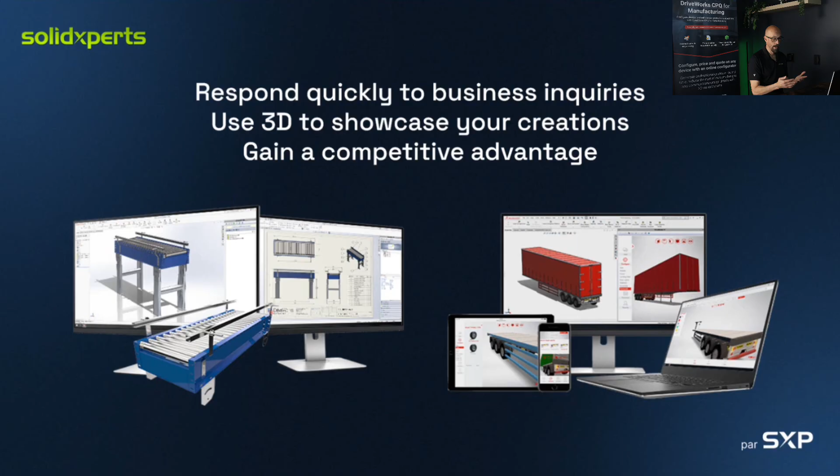And reduce the cost of those custom designs, because every time a customer just asks for a little changes here and there, the human or the team that does those changes, it's costly. So we're going to talk about how quickly you will be able to respond to those inquiries and gain competitive advantage because of those solutions.

So that product is DriveWorks, the perfect partner for automation. Our agenda of today is going to be introduction of DriveWorks, the DriveWorks solution. Brandon will help me out on that too. And we have the perfect guy to do the CPQ example for us. And at the end, comparison, we'll have a Q&A session also before thanking you for our webinar. And please stay until the end, because there's going to be something for you guys at the end. All right? I won't say any more.

So stay with us. Introduction of DriveWorks. So what's DriveWorks? Well, they've been inside SolidWorks solutions since 2001. It's one of the oldest Gold Partners of SolidWorks. I was in grade 1 at that time. Oh, okay.

They are focused on developing innovative, robust, and easy to use software since that time. Brandon will talk about how DriveWorks is a solution that you can own also. So we are a reseller of that solution. They do business through resellers, so we are your first point of contact for those solutions, and we have the expertise to do so.

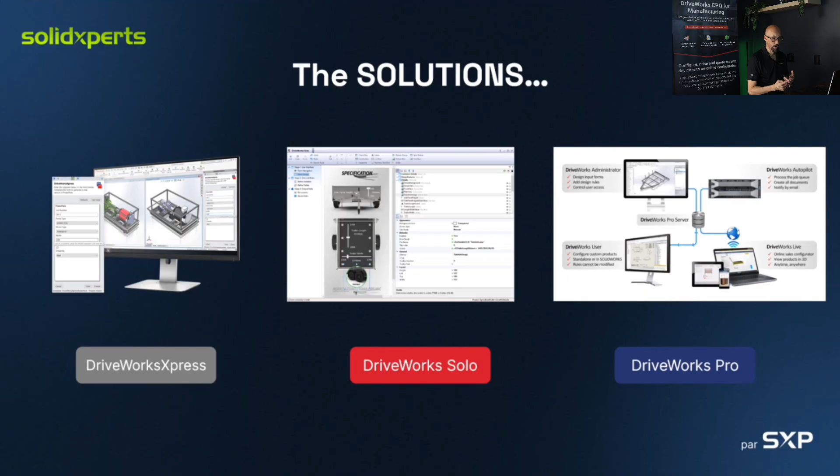So here we go - there's 3 solutions in DriveWorks: the Express, the Solo, and the Pro. So if we start with the DriveWorks Express, what does it do, Brandon?

Of course, the biggest subject that we're really addressing here when we're looking at DriveWorks is automation, or specifically - anybody who's worked with SolidWorks for a little bit of time may know what I'm talking about - parametric modeling. The concept of going into a 3D model, making some changes, and everything adjusts as it should, instead of exploding and falling into error and eating more of your time. You can make equations, you can make small interfaces in SolidWorks, and to be honest, as a man who's done that work already in the past, it can help automate some of the processes in your drafting department.

But it could be complicated to set up, complicated to maintain, it might not always be reliable. The beauty of DriveWorks Express, for example, is it eliminates the complexity of the steps of trying to parameterize that model. Once you've cleaned up your model of anything that can break, DriveWorks Express allows you to take control of these models easily and quickly. And more importantly, it's free with every single license of SolidWorks that you buy.

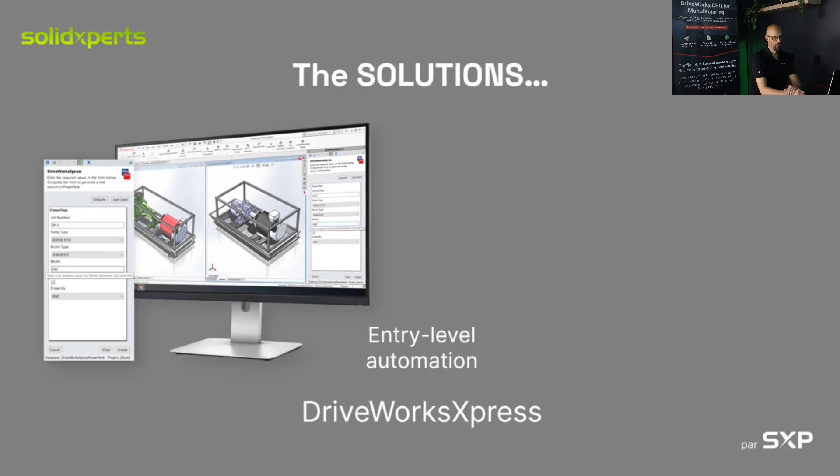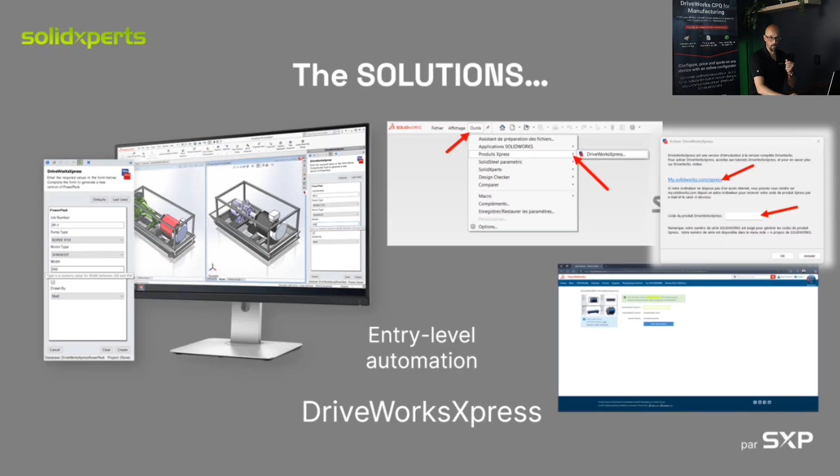Oh, and by free, meaning, how about activating your product? So why not go into tools inside SolidWorks, go into Xpress Products, and click on DriveWorksXpress. It will ask you to go on your My SolidWorks, and automatically it will know what computer is trying to seek that code. So it will read the serial number and give you a code that you'll be able to enter and activate your product. It's very easy, so try it.

Now we're going to talk a little bit about DriveWorks Solo. For me, when people first ask me what's the difference, what does Solo do that Express doesn't do, it's going to do a little more. Brandon is going to explain that to us, but keep in mind, it says Solo, so it's helping the person using it on his SolidWorks.

Precisely that. And just to make sure the image of what exactly these tools are is clear - when it comes to Express, Solo, and Pro, we're addressing different levels. So with every level you go up, it opens up more options, or vice versa, with every level you go down it will limit your options. So with DriveWorks Express, what do you get? The ability to capture your 3D model, to capture any 2D models affiliated to it, and it's going to generate a new set of files with a new name in a generic place, where you're more than welcome to go and do a pack and go afterwards and move it towards where you like.

However, coming into the Solo category, now you have control over the nomenclature of your parts. You can standardize the way parts are named, assemblies are named, drawings are made. You can also capture elements of drawings like scales, in order to make sure that when they're generated, they adjust a little bit better afterwards, as when pieces get longer, shorter, views - everything's going to need to adjust.

It doesn't stop there though. The options that you're allowed to set up as an interface for yourself offer more in Solo than they would in Express. In Express, they're very limited options - basic check boxes, yes and no's, menu boxes - but you get a little bit more to offer when it comes to Solo.

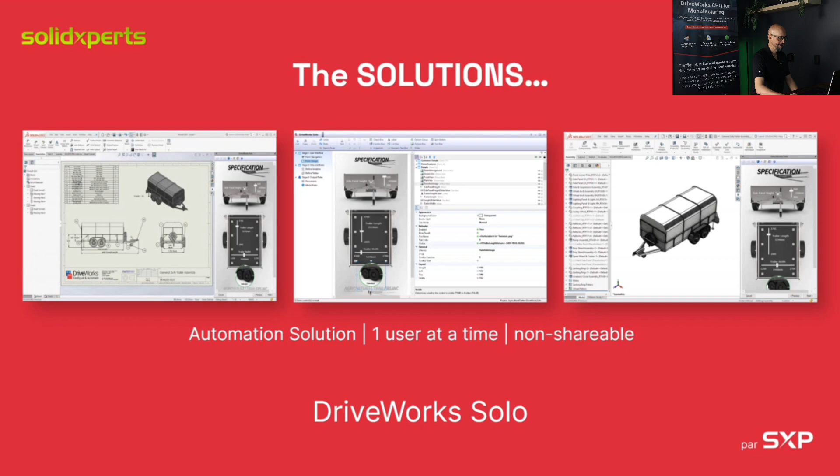All right, so the next solution is naturally the DriveWorks Pro solution, but I'm gonna let you stay at the edge of your seat. Brendan is gonna talk a little bit more about what it can do, but you see that the package here is more and can do more. So I'll let Brendan talk about that, but just to keep in mind, what you're about to see with DriveWorks Pro is more on the side of being able to create a CPQ, a 3D sales configurator.

It's not just helping the guy using his own station to make his life easier. Now it's on the company level that life is going to be made easier. Let's talk about interactive 3D visualization, integration to other systems of the company maybe, and also have a true guided selling item for your customizable products, with fewer errors, right? So we're at that point of the presentation. Here, I leave the floor to Brendan, and it's all yours.

All right, folks. So when we talk about DriveWorks Pro, to me, that is the Cadillac of DriveWorks. Effectively, you're at the highest level of power when it comes to DriveWorks, thus meaning you have the most possible options available to you.

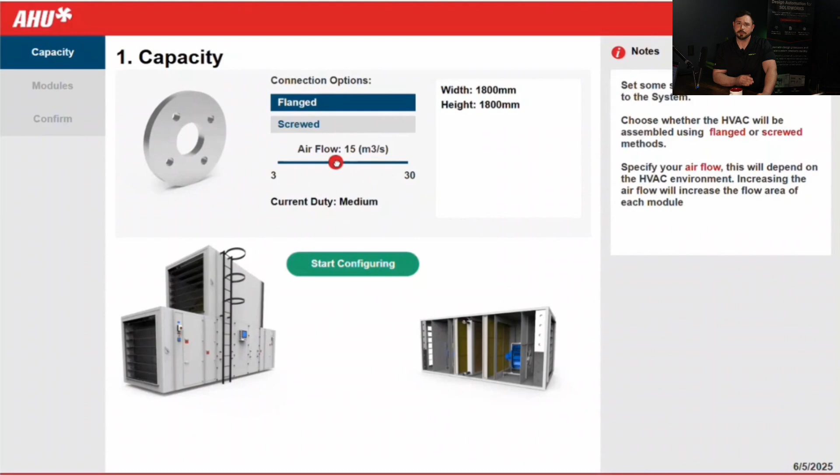The CPQ that I'm going to be showing you here right now is an example of a project that you can find on driveworkslive.com, as well as a variety of other projects that you yourself can go on right now and try them all out. Bear in mind that any project you try out is 100% made in DriveWorks.

This includes the interface you see here, for example, which is a project made for a generic HVAC company that does a variety of different modules. Everything we see in this interface was 100% made within DriveWorks. Every button, every dynamic menu that changes, every summary table we see is 100% made in DriveWorks.

Now, personally, as a guy who's had experience in HTML and CSS programming, it's not a quick task setting up a website, let alone trying to link it to your ERP with your engineering department and having sales incorporated in on this. There aren't many tools out there able to address all of that, especially at a comfortable pace.

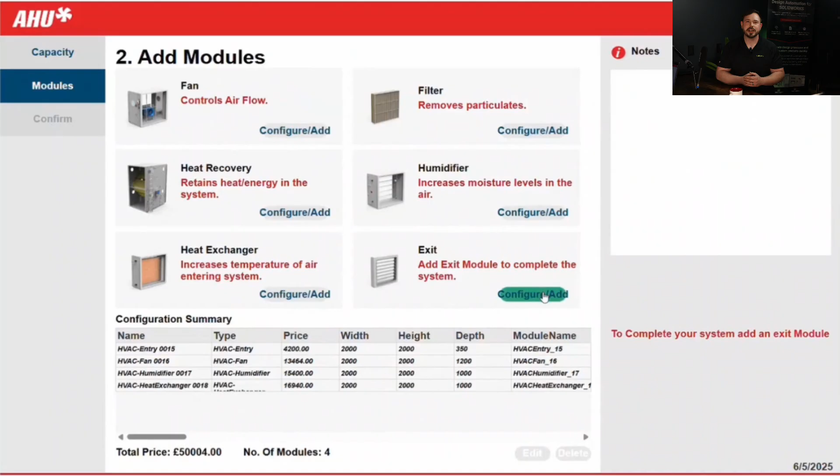So what we're seeing right now, I'm just going ahead and configuring several modules, whatever modules I might need for my HVAC needs, for example, and we can see that the menus are updating every step of the way. Now, I've only been talking about 2Ds and 3Ds up until now, but as Elliot stated, DriveWorks Pro is able to advance you across all departments and not necessarily just engineering.

With DriveWorks Pro, you have access to DriveWorks Live, which will allow you to make a web page like this that could be accessible directly for your clients or your distributors, for example, or maybe you only want to use it internally with your sales agents. This could be used by marketing. This could be used by engineering. This could also be used by production.

That's the fun part about DriveWorks, is you have the ability to expand the scale upon which it can lay its hands to increase revenue, to increase production. And as you can see here, quick point to note, I even just put my email and my contact information in here, which means I'm able to automate things like email sending processes, document generation processes, which I'll show you a quick example of.

What we see right now is the models that I just configured in that menu being generated one at a time. But here's the best part.

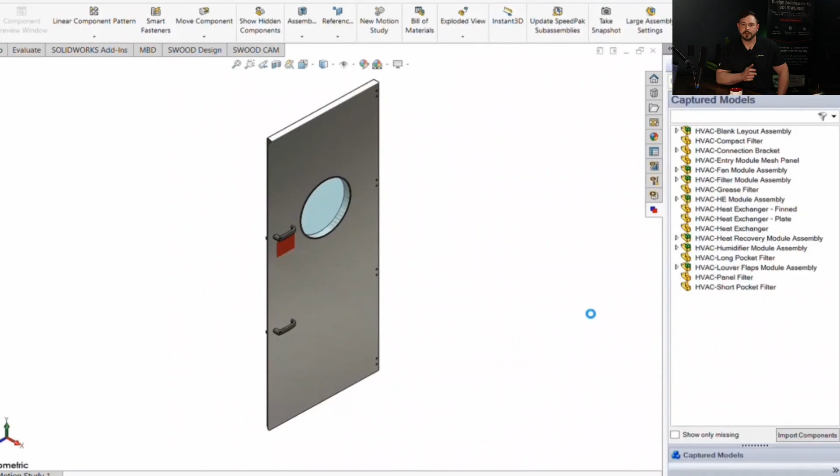Like mentioned with Express and Solo, those generations happen in your computer, so if you got a big generation to do, you're probably going to want to go take that coffee Ali was talking about. But with DriveWorks Pro, we have the DriveWorks Autopilot, where you can have a separate machine that is 100% dedicated to doing all your model generations in the background.

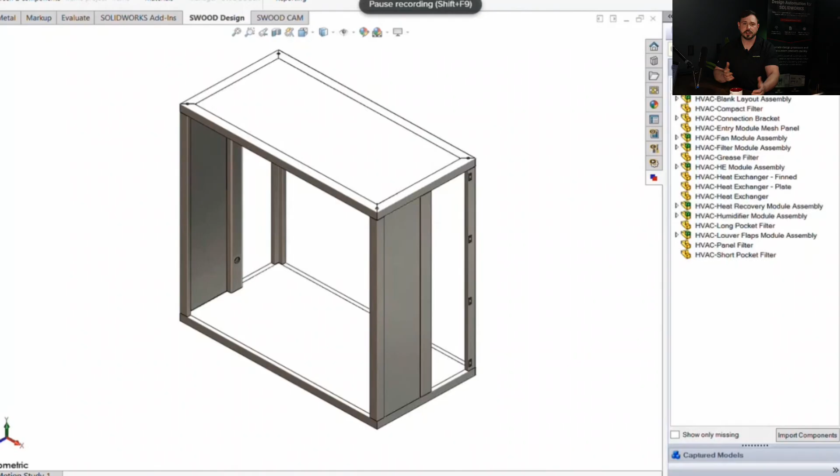Meaning your drafters have significantly less work. They fill out the interface, press generate, and then wait for that model to finish generating in order to advance it further. And above all, you're able to establish a workflow within DriveWorks Pro. This is how you connect your departments together, having states of approval, having steps to determine what should be launched where, and who should have the right to approve which documents when you get to those steps.

What we can see here is my autopilot just coming to finish a process of generating all of the models that I've just come to configure one at a time in the process.

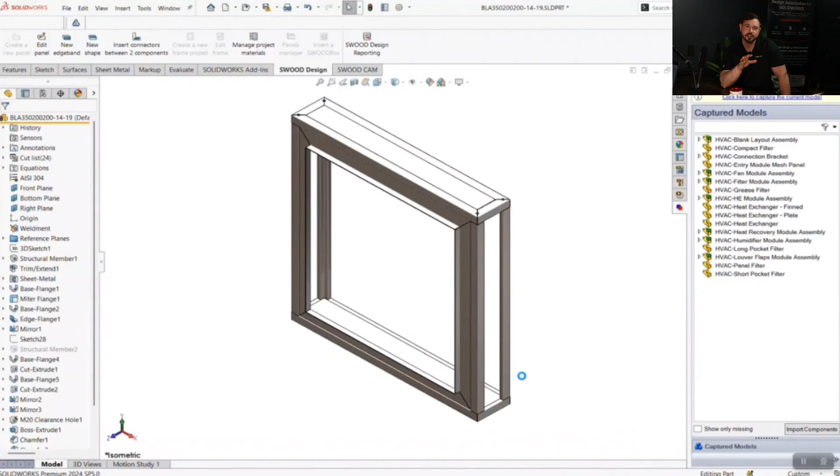And there's one more thing that I haven't mentioned. This to me personally is the cream of the crop of DriveWorks: the final assembly. What does that mean? Up until now, everything you've seen we've configured are modules that exist as a master model - you capture it and it just regenerates the same model with the changes you want. But right now, this isn't a master model. What DriveWorks is doing for me is building the final assembly from all of the models it just generated for me in the process.

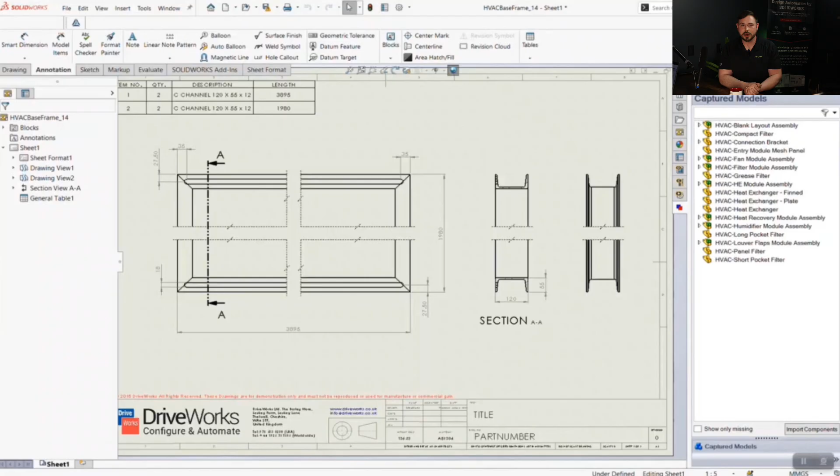And the fun doesn't stop there either, which you'll see a little bit later on in this example - it's also able to generate your drawings for you as well and try to predict the scale to make sure that, if it can't do 100% of the generation properly, then at least a good 80 to 90% is done, thus optimizing the time for your drafters altogether.

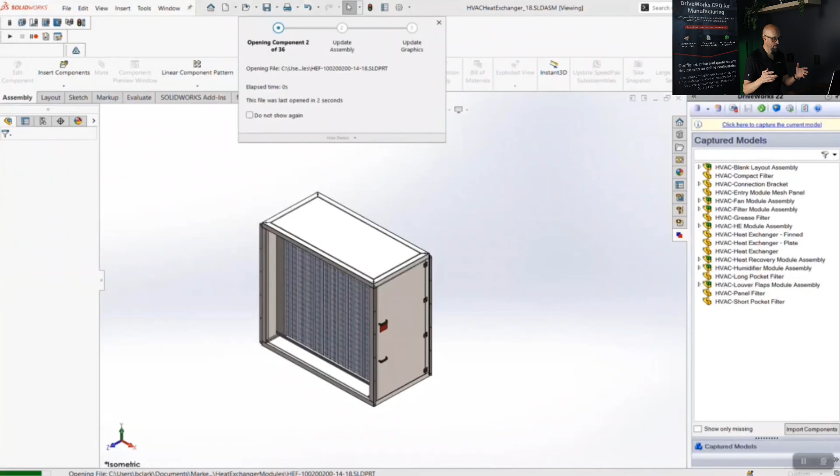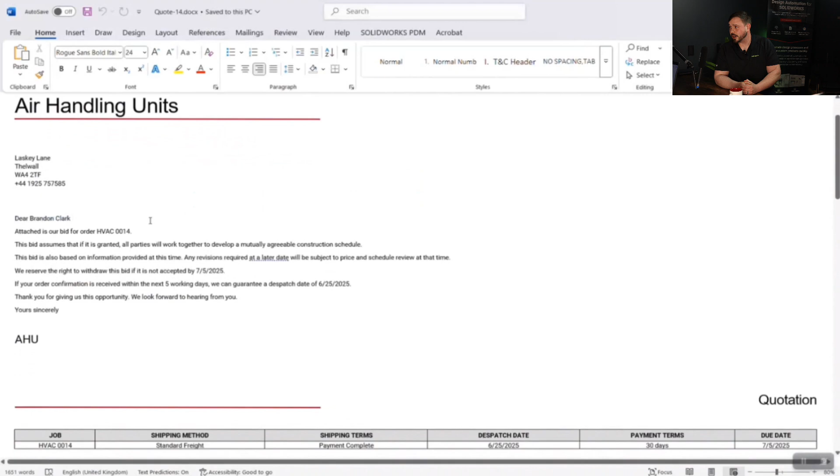Well, basically, whether you automate a part, many parts, or the complete assembly, it's going to accelerate your work anyhow. So it doesn't need to be 100% of the whole thing you want to automate. But if you automate 50, 75, 80%, wow, that's a lot already. You're saving 50, 75, or 80% of the time, which over a year can be quite a lot of time for salaries, that's for sure.

And as we can see here, we have a good example of a document generated, which I have another example coming up as well. So what types of documents can you generate off of DriveWorks Pro?

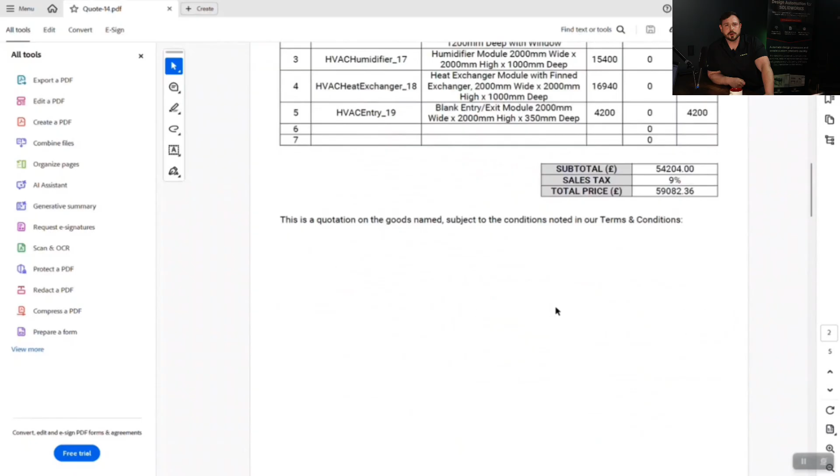Well, you're not just limited, of course, to Word documents. You have the option of generating, like for example what you see here, PDFs. You can generate Word documents, Excel documents, XML documents, JSON documents, HTML documents. I could probably spend the next 30 minutes going on the types of documents that you can generate. From your 3D format, you can export virtually almost any format you would need - IGS, STEP, DXF, eDrawings. Virtually everything that you could ever need to export from this model can also be automated in the process.

All automatically. Well, we've seen all of that going on, and there's an architecture behind that - behind all of that is the architecture of DriveWorks, all the technology that is running behind.

And if it's the rule editor, the form designer, the workflow that are being able to be created - you saw, like Brandon said, different person, different permission to be able to start creating on a project or not. They can be grouped, they can be just one user, and those permissions are different.

So we automated the CAD. We saw also that the models could be also 3D configurable on the web page also, so it's not a SolidWorks model that's heavy to run on the website. Integration of your systems.

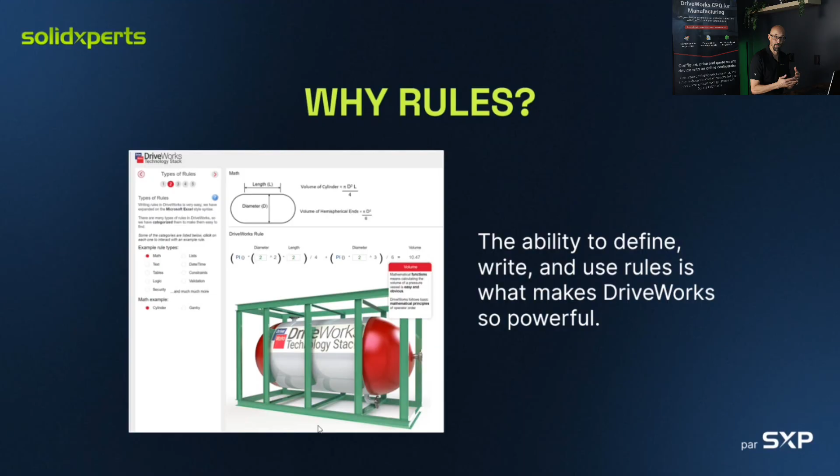As you can see, we have a pretty passionate team that does work in those solutions. I'm the first one out there on the line to show you the possibilities of the product. But people like Brandon and the guys on the team, we all are passionate about the product that we care and show you guys. So that passion shows into the result that we do put in.

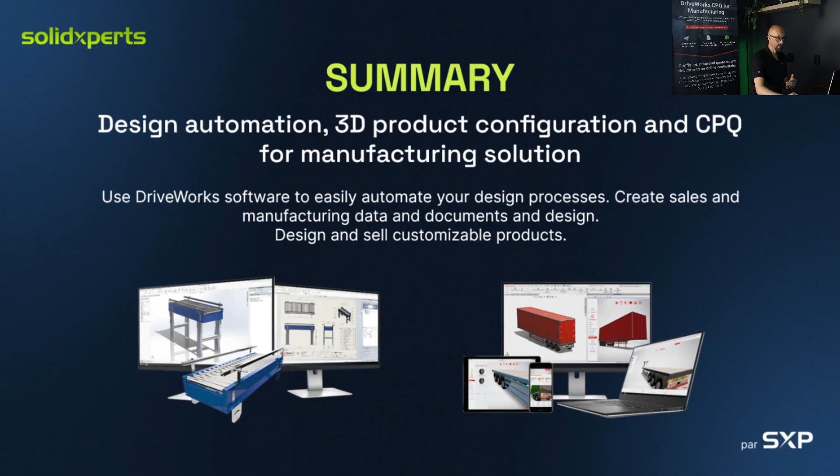So to summarize a little bit what you saw is how to design automated 3D product, how to create a configurator, a CPQ for the sales, a web solution if you desire that. We can go up to there with the DriveWorks Pro solution. So don't hesitate, call us. We'll talk even some more about that.

You don't need to be a programmer. I mean, we need to know rules and logic, generally speaking, but these are the rules and logic on how you work. Generally speaking, the interfaces of DriveWorks, understanding how to build interfaces, understanding how to capture models, how to build your project is much easier. In my opinion, the interface is made to be as simple as humanly possible to allow any user to be able to learn how DriveWorks works.

We're not leaving you in the dark as soon as you buy DriveWorks. We're always there to provide training courses for the basic understanding of being a DriveWorks administrator. But even going forward, if uncertainty still remains a problem, we have built full projects for clients in the past where we can teach you how it was built afterwards to keep your autonomy in the process. Because that, to me, is what's most important, is avoiding being dependent on somebody and being able to take control of your own system.